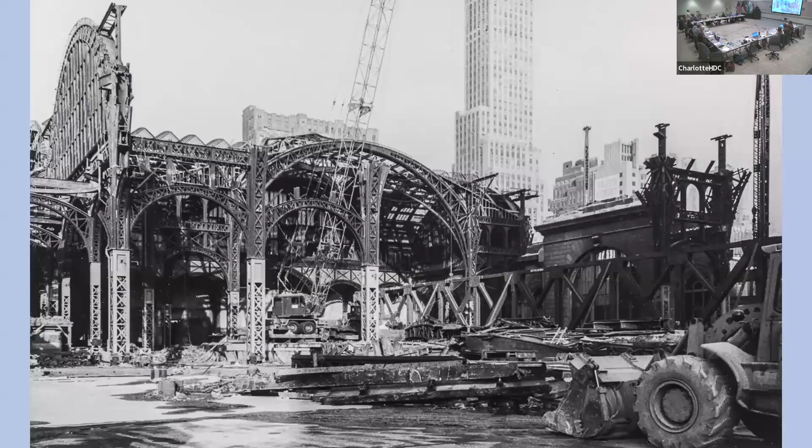Jane Jacobs writes her famous tome in 1961, The Death and Life of Great American Cities, which was kind of an academic response to urban renewal. Then there was a catalytic event: 1963, Pennsylvania Station in New York City was demolished. Well, it took several years to take it down and replace it. It's where Madison Square Garden is now. That was such a stunning and visual event that it really galvanized the modern preservation movement and led to a political response, which was the National Historic Preservation Act of 1966.

LBJ signed that document into law, and that is the linchpin of everything that we do in government, at all levels of government, pertaining to preservation. It arguably most importantly established a checks and balance system within the federal government to review taxpayer-funded projects that may impact historic resources. We call this Section 106. If you pull up the National Historic Preservation Act, it's Section 106 of that law. To this day, it may still be the most impactful legacy of this bill.

There's an entire team in my office that does nothing but Section 106. Anything you can imagine, from cell phone towers to road widenings to railroad right-of-way issues to community development block grants, funding from HUD, everything goes through Section 106. So it's a huge part of the law.

This law also established the National Register of Historic Places, which is the government's list of historic stuff, so to speak. That's a huge part of what we do at the state level. And it authorized a federal grant program for restoration of National Register listed properties. That's the seed of the historic tax incentives program, and a lot of what I do pertains to that incentive. I'm not going to get too deep into that today.

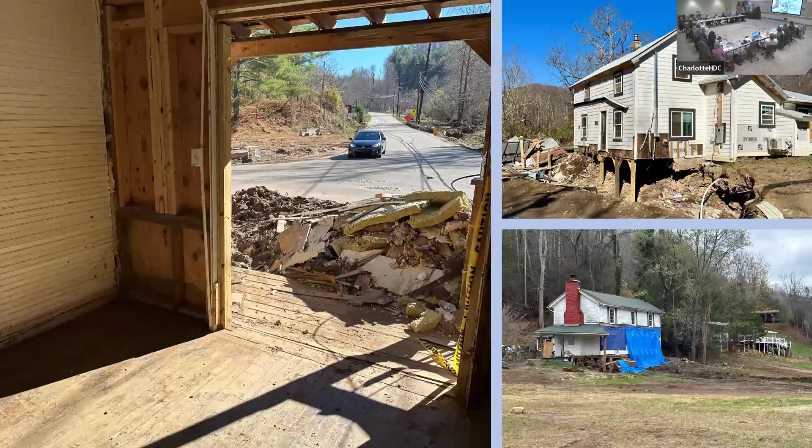Last year, I should say, and into this year has been especially different and challenging in certain ways with Hurricane Helene hitting the western counties. We have one specialist based in Asheville who was displaced for several weeks. She was overwhelmed, and so if you called me in October, November, and I did not return your call, I'm very sorry. We divided that service district up, and I did a lot of work specifically in Yancey and Mitchell counties.

Immediately following the storm and ongoing, helping folks dry out historic buildings. As you may know, historic materials behave a little bit differently when exposed to water compared to some newer materials, and providing assistance on structural assessment. A lot of properties had two major problems: a lot of inundation, and a lot of land movement, either landslide activity or foundations being undermined by essentially new rivers that came up. So a lot of really challenging issues out there that continue into this year.

So that's a major thing that our branch has been grappling with.

But we are bureaucrats, and I like cartoons. And I heard a cartoon mentioned earlier from the 70s about the Charlotte Historic District Commission. I bet there've been a couple cartoons in the Observer about this body. I would think preservationists are often the butt of jokes.

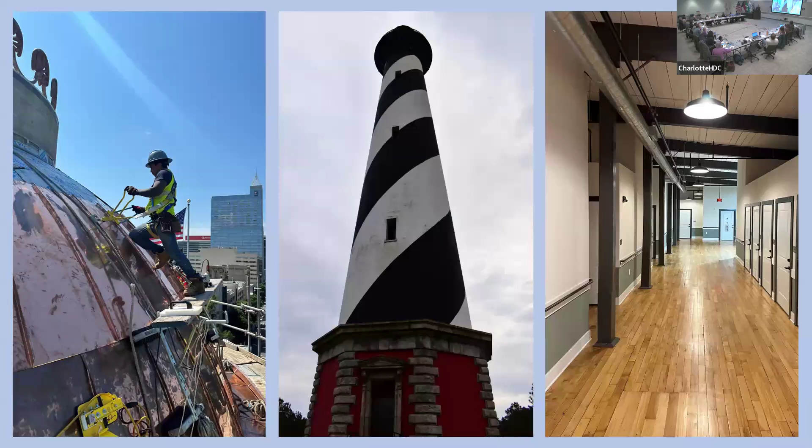But we are bureaucrats in a way, and I do have review responsibilities, just like you. We review federal undertakings. So in the center, the Cape Hatteras Lighthouse, that is a federally owned building. It's undergoing restoration currently for the first major time since it was moved in 1999, 2000. So we automatically review that project under Section 106.

The state of North Carolina has a corollary law, GS 121-12A, that makes us review in an advisory capacity state undertakings. This past two years there was a big restoration project at the state capitol, and we were very pleased that the General Assembly welcomed us in as consultants and made a space for us at the table when they didn't necessarily have to, which went really well. And on the right-hand side, tax credit projects, mill rehabs, we review those all day.

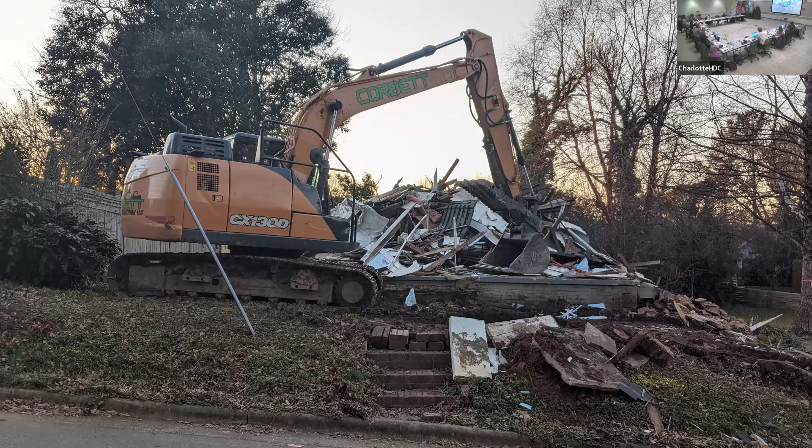Not in a way that's disingenuous, but in ways that help expand that perception of what we do. Preservation is all about change. If things didn't change, there would be no need to preserve anything. So what you all do as commissioners is help manage change on behalf of the city as enshrined in ordinance. That involves inevitably demolitions, some tragic, some not so tragic. It involves finding creative solutions, sometimes accepting solutions that aren't ideal but are still victories, maybe with a lowercase v instead of a capital V. Building relocation is sometimes a solution like that. It's not necessarily ideal, but better than demolition. What we really aim for, as people interested in old buildings and how they survive and remain durable over time, is for buildings to be in continual use, continually enjoyed by the public.

And that's really what the goal is here for everybody, whether you're working on a mill rehab through tax credit review, or just someone updating a kitchen, building an addition, or doing paint work to their shutters or front door. It's all about keeping these buildings in use and helping them communicate their story.

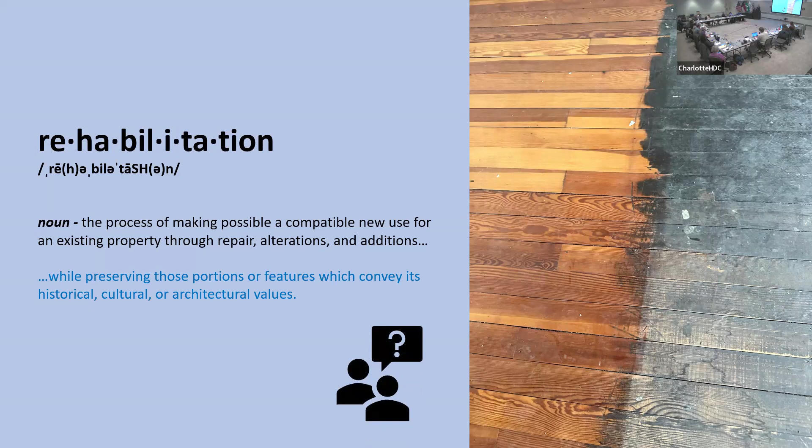So buildings are storytellers. In order to keep them alive, we have to keep them modern, up-to-date, safe, enjoyable, comfortable, but we want to preserve the elements of the buildings that best convey their history. You're like, okay, well my head is spinning. That sounds so esoteric, I don't even know where to begin. Well, luckily we have, as I like to call them, the 10 Commandments of Preservation, the Secretary of the Interior Standards. This is the roadmap for finding that balance between modification for continued use and excellent, wonderful storytelling on behalf of the building.

So what are the standards? 1976 was a big year, 77, big year, bicentennial. Charlotte Historic District Commission was founded. At the federal level, they put these 10 standards for the first time into the Code of Federal Regulations.

1966, like I said, had been the National Historic Preservation Act. National Register was established that year. It took about 10 years for the feds, the National Park Service, to understand that their small grant idea from the 60s needed a roadmap for how to review those grant projects. They actually began as 8 standards. They became 10 in 1976 and were published in 1977.

I am constantly amazed by the longevity of the 10 standards and how actually brilliant they are in a way. They haven't been substantially edited since. The wording's been tweaked on a couple of them, but it's not like one has been replaced entirely or totally rewritten. The 10 standards are basically about to be 50 years old.

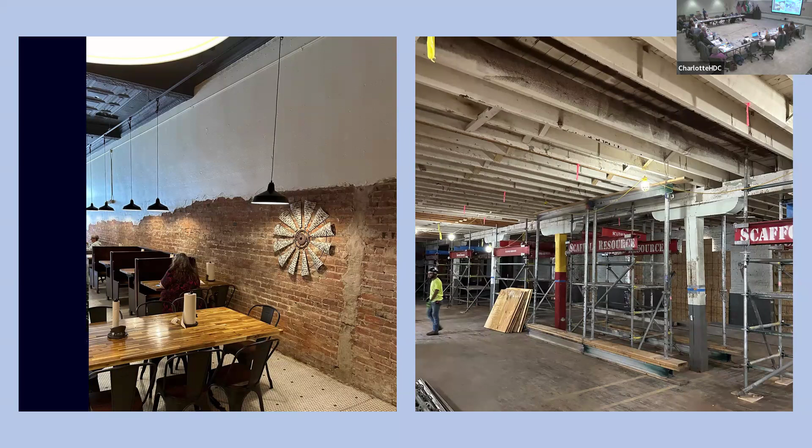This one, again, you're not seeing a lot of adaptive reuse in what you do. You're seeing mostly residences that are continuing to operate as residences, but very key to the standards is understanding that it's good to tailor your new use to fit the building, not tailor the building to fit a new use. And we see this a lot in mill rehabs that increasingly are going for brewery use, or in this case, distilling. This is a brand new distillery in Mount Holly, North Carolina, not far from here. That's not a bad use for an industrial building.

You need big open space, but imagine putting that still in a house. Then you're looking at taking out a hall and a formal room and making large structural changes to the building. So you probably get where I'm going with that.

And the last two points: accommodating change is part of the rehabilitation process. It's crucial. It's part of the process, not at odds with it. However, change that is modest in scale and generally reversible, those are desirable traits. We're going to talk a little bit more about that.

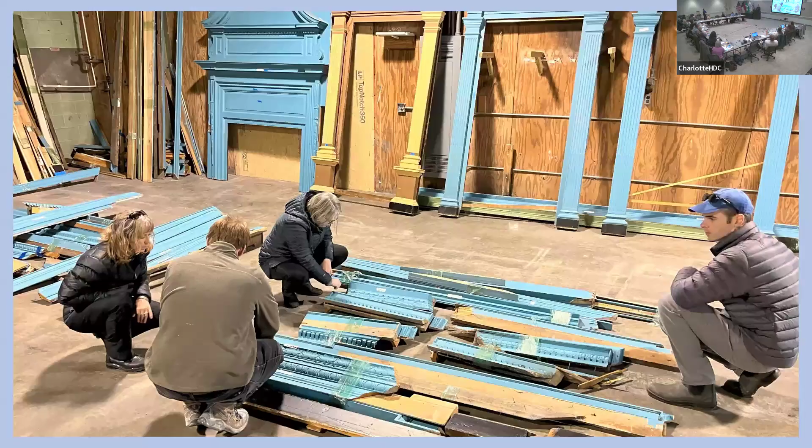They probably found that this room has been getting pretty dusty and people aren't interested in that type of presentation anymore. So after several years of back and forth, that woodwork has been repatriated to North Carolina, to Edenton. We got to go up just two weeks ago and check this stuff out. It's been moved back, it's in storage, and they're going to start installation in March. Should take probably six to nine months. But I thought you'd enjoy hearing about this story.

I wouldn't say that in 1918 they were thinking about the reversibility of their action, the Brooklynites who came down here to get the woodwork. I should mention that in the 60s and 70s, Edenton replicated this woodwork, so when you go in there are very high level replicas of all these pieces, which they will now take out and try to salvage in other historic properties in the area. But it's one of those things where, wow, 100 years go by and this stuff can be reused.

And in fact, it was in pretty darn good shape, not a lot of damage from two removals - removal from the Cupola House initially, and then a second removal from the installation in Brooklyn. So reversibility is something y'all are probably going to be thinking about with regard to additions, probably most specifically additions, since you don't look at interiors as much. We look at reversibility a lot for interior changes to floor plan, stuff like that. So I wanted to make you aware of that.

I do have a question.

Yes, shoot. So when you were talking about looking at use, I thought I'd heard on this commission before that we don't get into use. Is that something more with when it's commercialized versus residential?

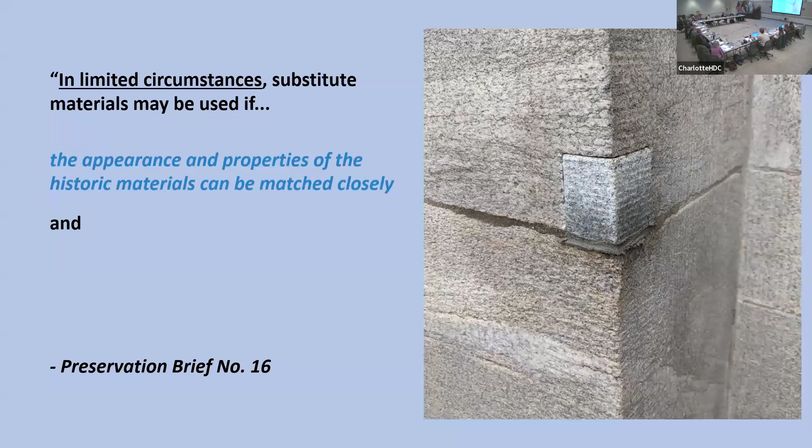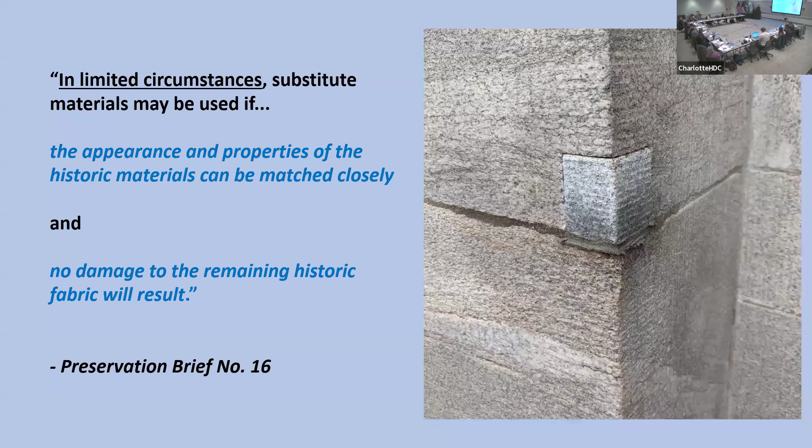So if you pull up Preservation Brief number 16, it says in limited circumstances substitute materials may be used if - and it gives two limited circumstances. The appearance and properties of the materials can be matched closely. So we're thinking about visibility, the visual presentation, and we're thinking about performance. How does it behave, how does it interact with water? Mainly, that's our main concern in our climate. So you want to get the whole authenticity question out of your mind, think about what the material looks like and how it behaves. And really, is its behavior going to create problems for neighbors, for the material right next to it, which may still be salvageable, may be historic, may communicate the history of the building. So we want to make choices that will not damage the historic fabric of the building. These are the two limited circumstances where you're really thinking about the possibility for a substitute.

So we'll expound upon these limited circumstances. Unavailability of historic materials - classic example is Connecticut brownstone, Portland brownstone. Up in New York City and Brooklyn, 1870s, they called it the Brown Decade. They were quarrying all this brownstone from central Connecticut to build that neighborhood. Well about 20, 30 years later they found out that the clay content in the stone made it a really crummy stone for building use. It expanded and contracted with moisture differences, freeze thaw. These buildings started to disintegrate. Uh-oh, it had durability issues, and then the quarry ran out of stone. So you can't get replacement Portland brownstone anymore. They closed the quarry.

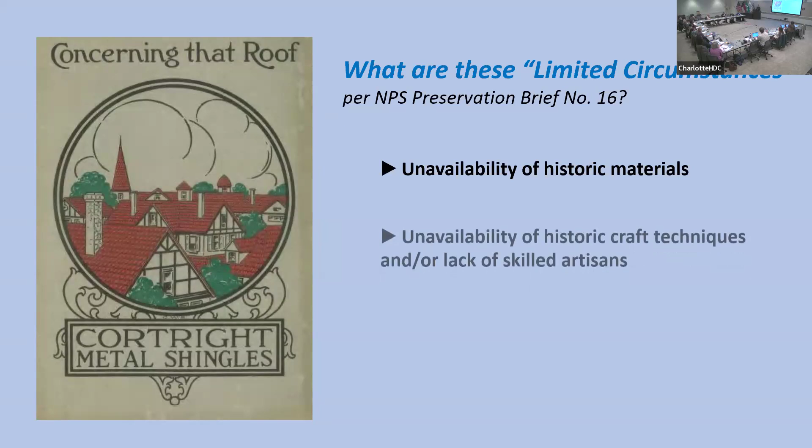Certain craft techniques are now hard to replicate or hard to find artisans to execute. The main thing that comes to mind in North Carolina for me with this circumstance is true standing seam metal roofs. It's hard to find artisans who can execute a standing seam roof in the traditional style. I'm not saying they don't exist, but they're not in every city. And your mind is already racing, I'm sure, about window restoration, for example.

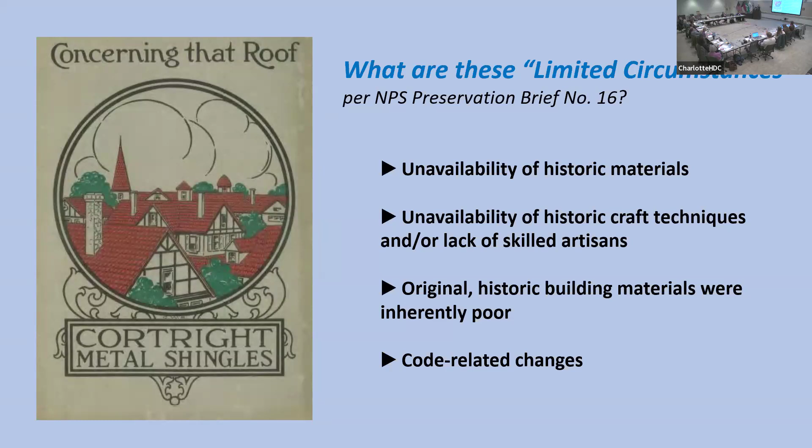Another limited circumstance, like the brownstone example, is if the original material was inherently flawed. Or code-related changes - this doesn't apply as much to this part of the country. Out in California, on the West Coast, there's a lot of seismic code issues that require heavy building materials, particularly those at height, to be replaced. So these are some of the extenuating circumstances outlined by Park Service, where we should open our minds up a little bit broader to the possibility of a substitute, granted again if that appearance and performance, and no damage to the surrounding fabric, if those criteria are met.

So something really exciting happened last year - Preservation Brief 16 was updated. And in fact one of the lead authors, Amy Elizabeth Ubel, is North Carolina's assigned reviewer at Park Service. She's a good friend of mine, and she was on the team that did this. My number one homework assignment for you, ahead of looking at that standards book, ahead of interpreting the standards bulletin, would be to read the reissued Preservation Brief 16. I challenge all of you to do that sometime before your next meeting.

You'll thank me later, because of the way that it's set up. The first part talks about the limited circumstances and gives you a framework of thinking about it. The second part that they added runs through all these different kinds of substitute material.

Anything from fiber cement to urethane 3D printed building features to cellular PVC, and all the typical players on the market today. It goes through each different class of substitute material, talks about performance characteristics, and areas where that material may be appropriate for use. I can't stress enough the value of the reissued Preservation Brief 16.

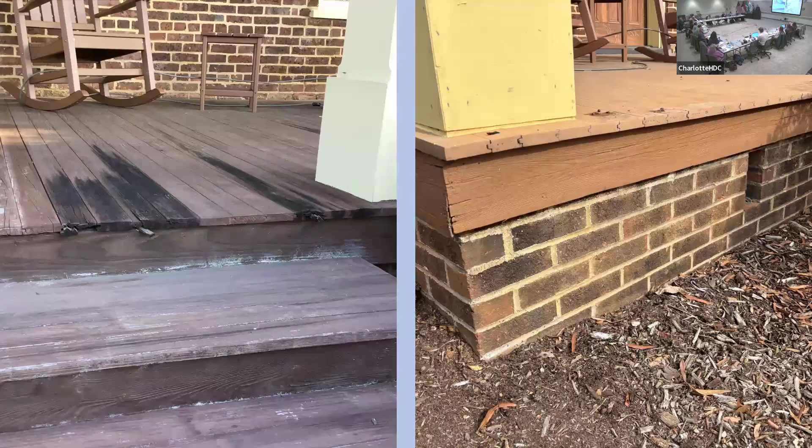I can't remember the next slide, but I think it's — yes, porch floors, a constant topic of debate.

This is an area where I've really seen a lot of change just since I started at the SHPO like 7-8 years ago.

PVC tongue and groove porch flooring is becoming more and more available, and we're getting feedback, having seen it installed in locations for 5 or 6 years. Porch flooring is subject to pretty challenging environmental conditions: UV exposure, cyclical wetting, exposure of end grain to water, expansion, contraction.

So in preparation for this talk, I went and revisited a couple of installations of PVC tongue and groove porch floor to see how they had done 5 or 6 years later. This is at the Page Walker Hotel in Cary, an 1880s hotel building.

The town of Cary owns it, and they called at wit's end because they had replaced the floor several times. The town was like, we can't continue to revisit this every 10 years, having to repaint if not selectively replace it. They were finally at the point of needing to replace it all again, asking: should we use wood, or should we consider a substitute?

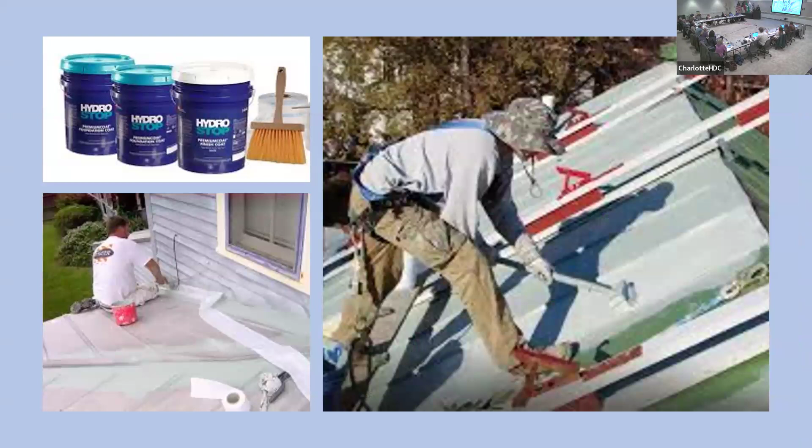My recommendation always when you have a flat panel standing seam roof is to do what you can to try to prolong its lifespan. There are hydrophobic coatings, two-part coatings that work with a mesh layer that perform really well on these roofs. So flat panel standing seam is always a good candidate for repair.

Metal shingle is trickier, and in y'all's districts you don't have a lot of metal shingle. Does Dilworth have some metal? Metal shingle was real hot in the 1900s and the 19-teens, Queen Anne into early 20th century, so this Foursquare style. But bungalows, I don't know - I can't think of any.

Does the house next to it have copper, or is that slate? Am I thinking of the slate? We have a lot of slate. I can't think of any slate. Pressed metal - Candace, was there pressed metal?

No. Anything in Fourth Ward? Yeah, the good news, Sarah, can you think of one? I want to ask a question about roofs, but I can't think of a situation.

The good news about metal shingle is that they're back in production, and some are better than others. How successful this replacement is, I think it's good enough. What I think is harder is the panelized metal roofing on the porch.

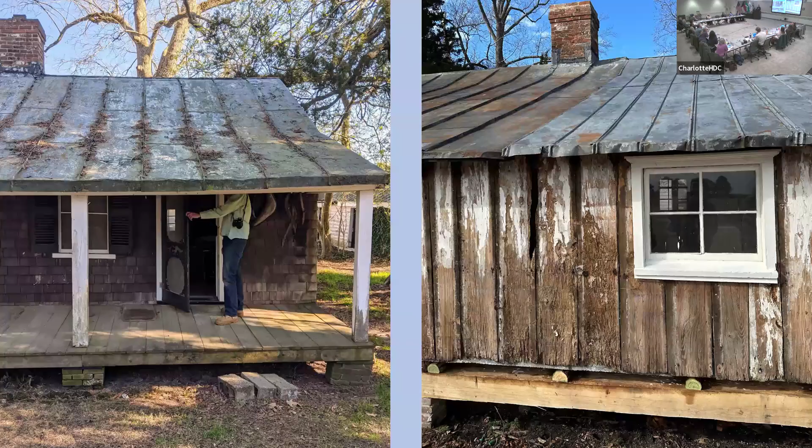Like the Victorians that we have, the roofs are pretty prominent and they have the decorative slate and all of that as well. So the discussion amongst the commission would be, you have these areas of decorative slate versus regular slate. How can that be replicated with an architectural shingle or even a faux slate?

More often than not, slate roofs are pretty prominent because it's a high level material. They didn't put it up there for kicks, for fun. They wanted people to see it. So most of the cases you get, I would reckon, are going to be fairly visible.

The other challenge with roof replacements is the need for warranties to exist and to be covered, to cover the installer. So your ability to get creative on a roof replacement, say to salvage slate on one roof plane while tying in new slates or a substitute on a separate section of the roof, gets pretty hard to do. A lot of manufacturers won't honor their warranty on that, and installers won't honor a warranty on it. So sometimes your hands can get tied a little bit more easily in a roof replacement discussion.

So I wanted to show you all just briefly an interesting building that came up from Edenton. This is also in Edenton from a couple weeks ago. This is on the site of Hayes Plantation outside of Edenton. This is a slave dwelling from, they guess, about 1840s is the supposed date of construction on this building.

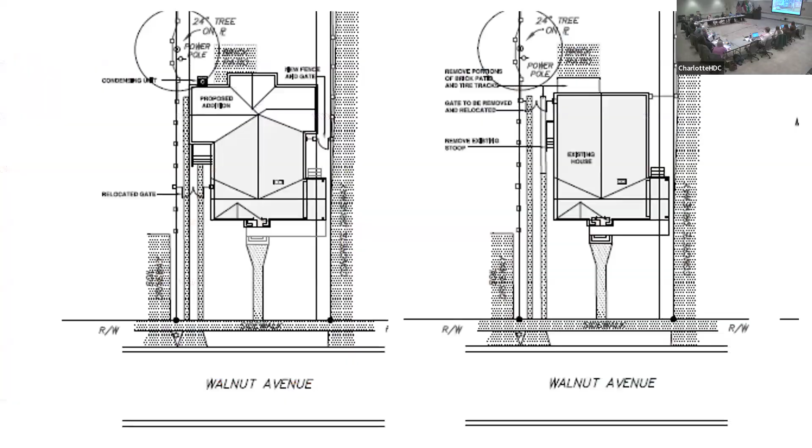So we continued to push on the architect. And what we got to was an addition that I felt like really epitomized the homeowner tax credit at its finest, where there had been a discussion. I'm not just saying that because we got our way.

Because it was a back and forth. And I think there was, now I never communicated directly with the building owners on this project. It was always through the architect, but I got the sense that there was curiosity involved and a willingness to see things in a different way. And ultimately these folks went from a two-story addition to a single-story addition. So they gave up a lot in the process.

And I don't know what screws you guys were turning on your side, but I think it got to this before the commission even saw it. It did. It got to this. I cannot remember if it came to workshop. It may have come to workshop with the ones that you saw.

So the high level non-binding feedback of the commission, that's where, and you can still argue the volume of the entire addition exceeds the volume of the original house.

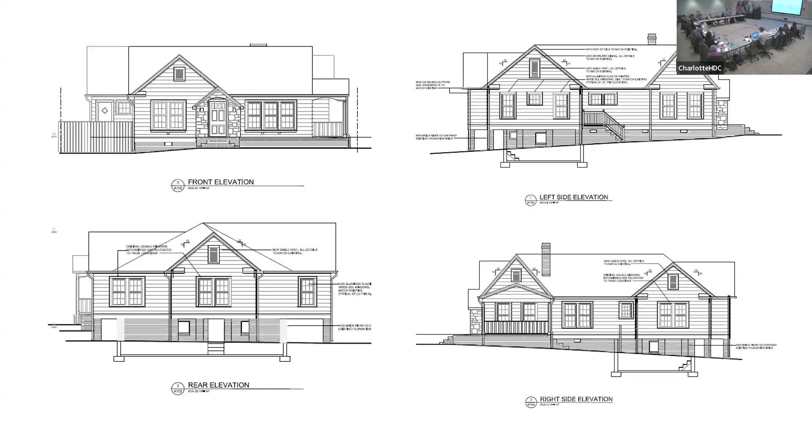But that's not readily apparent from the street. We feel like it's rehabilitation, right? It continues to make this house perform in its current context, in the real estate context. And, you know, I forgot about this. We just like our space in the US. We like space, that's what's desirable. As preservationists, we have to recognize that at some point.

Of course, when it comes to infill, it's becoming increasingly hard, and these are all from Raleigh, to sometimes locate historic houses in their historic environment. And so I think I've showed you these two before.

And what's so excellent about y'all's standards is you have this wonderful section that illustrates through great graphics what we're aiming for in terms of setback and scale. That's section 6 on new construction.

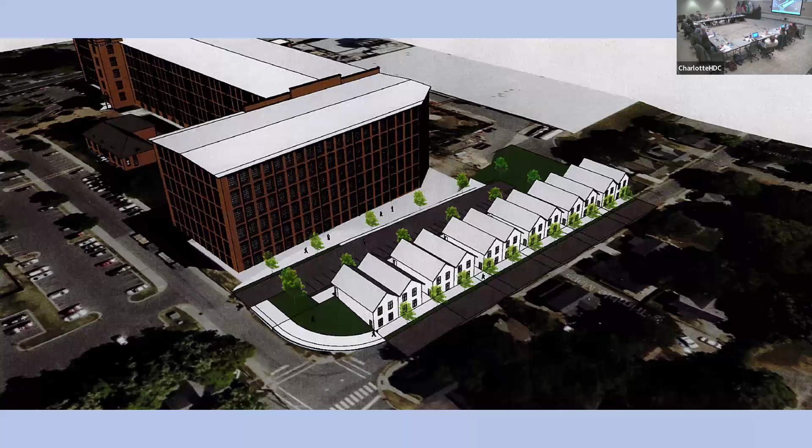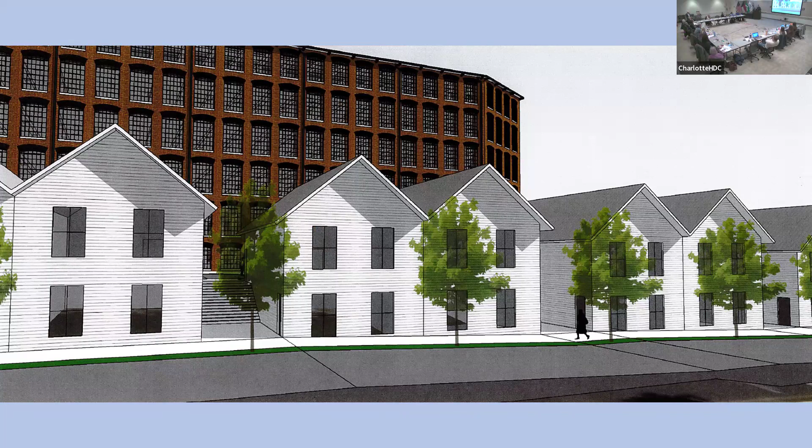This conceptual rendering—even today when I look at it, they remind me of the little house pieces in Monopoly. It's like someone went along and stacked up houses next to Boardwalk. Obviously the design wasn't all that well formulated. I want to point out that the way these properties were going to be accessed was actually on the mill side—there were going to be parking spaces, and the entry door would be on the mill side, not on Vance Street. They would be activated in the direction of the mill development. How do you all think we responded to that?

What are your thoughts on that in regards to some of the concepts we've discussed? Form, setback, orientation—if we go back to Standard Number 9, we're talking about the integrity of the environment. I know.

It's a lot more jarring to have the orientation face a parking lot—for me that's the biggest issue with this, because you're taking away the intention of this being a neighborhood street when you flip the entrance to the back. That is, in my opinion, the biggest disruption. We shared that view, and the National Park Service shared that view. We felt the proposal fell short of protecting the integrity of the mill neighborhood. It's taking what had been mill houses and flipping the entrance the other way. What happens to Vance Street when it becomes an alley behind these new houses? So orientation, in that case, rose to the top of the list.

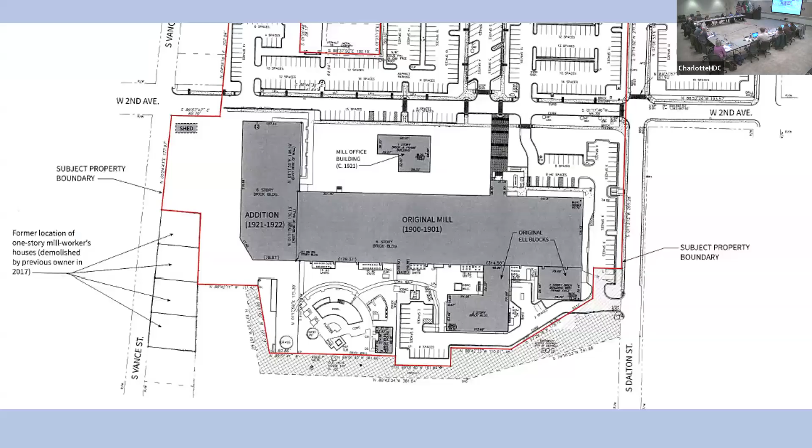I'd suggest too that the way you're framing it is like how some architects have framed things to us as, here are the two options. And if they're both bad, I think it's incumbent upon us to say that, and to say we don't have to accept an architect's rational and expected advocacy for their client as the only options we have. Sometimes our answer must be no.

Agreed. You cannot meet your client's needs or desires on this site, flat. And I think that's a very difficult thing for some people to say. So that's, I guess, why I'm here.

But I just think that's a really important thing for us to remind ourselves: that just because we're presented with a set of options doesn't mean those are the only ones we have to consider, or that we should think one of those has to be acceptable.

I completely agree with you, Cameron. And I'll add to that, that sometimes we've been met with, well, give me what I want or the house gets it—you know, we're going to demolish the house because legally we can't stop that from happening. And I'd say our response to that is: you still won't be able to build this.

That's awesome. What did the state say? No.

What happened was the Part 2 application was approved on the condition that this design not be constructed and that it be rethought. And we haven't yet gotten an update on that design. But yeah.

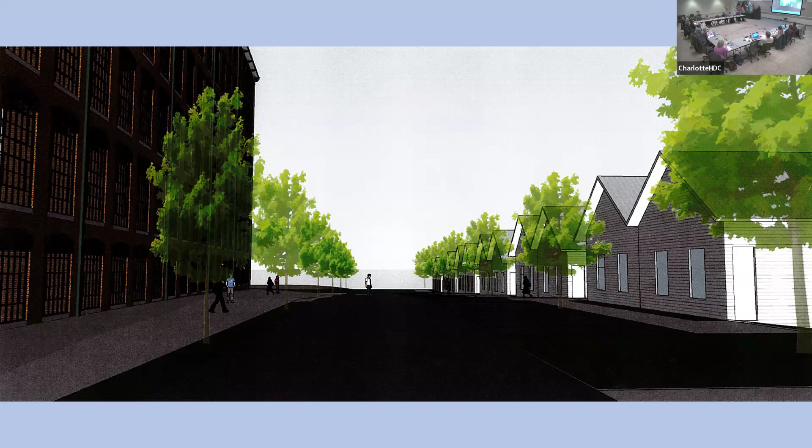I'll show you one last example from Charlotte: Johnston Mill, North Davidson Street, East 36th Street. That's the new building. I don't know, are y'all familiar with this development?

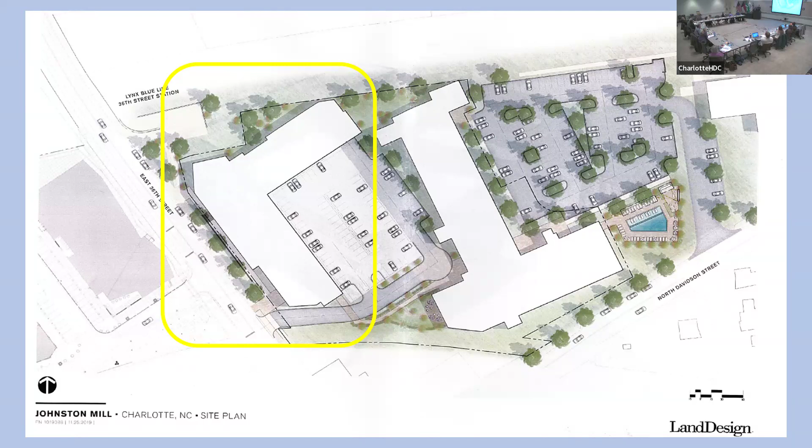We reviewed the new construction formally. It wasn't a focal point of our review—obviously the mill itself was—but because the new construction occurred on the mill premises within the National Register district boundary, and because they demolished a very deteriorated building on that footprint that had been functionally related to the mill, we got the chance to comment and review on the new construction.

I'll show you the evolution. This was what came to us first, in a preliminary review before the tax credit application even arrived. You can see a lot of kind of adventurous things in this proposal—for instance, this giant light well created in the mill itself. Obviously some architect didn't understand tax credits at that time. But we were looking primarily at the volume of the new building.

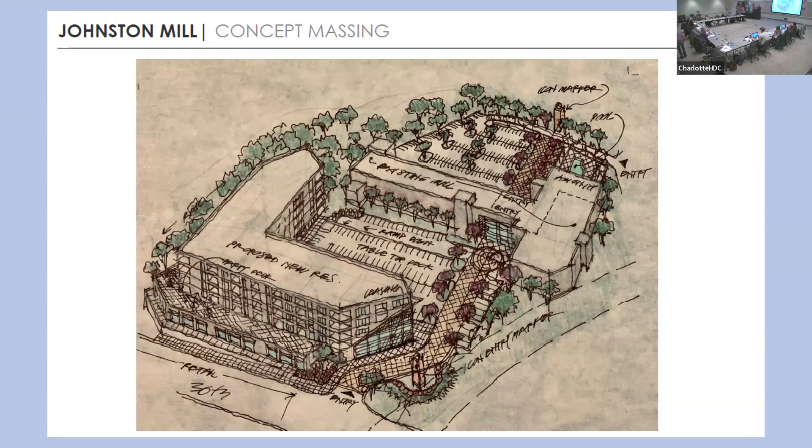We saw a building that was in almost all aspects larger than the mill, but particularly taller, which was our main feedback. We understood our relatively limited role to police, so to speak, how they were going to detail the new building, but we felt like it was much, much too high relative to the height of the mill.

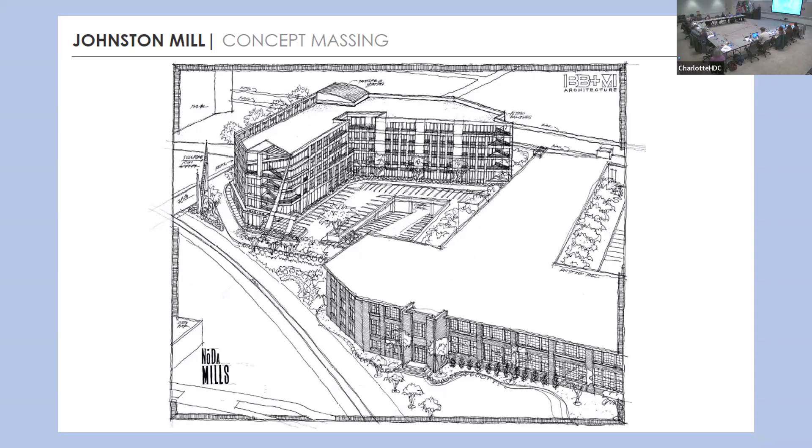This is another view of that initial proposal. You can see sort of the sculptural details that had been envisioned, the cantilever balconies and stuff—that was all again quite daring. We understood we may not be able to influence much of that element of the design, so we really focused our feedback on height.

What we got was, in the area closest to the mill, a concession of a story. So you can see the drop down where they're at 4 stories closer to the street front of the mill, and then along the light rail corridor they've kept it at 5.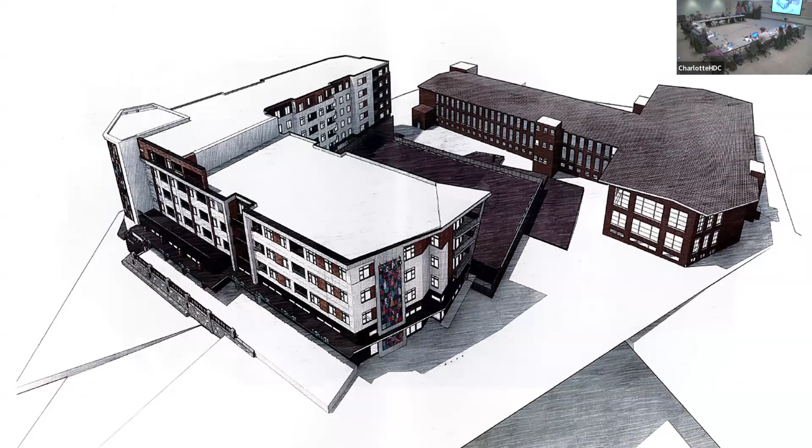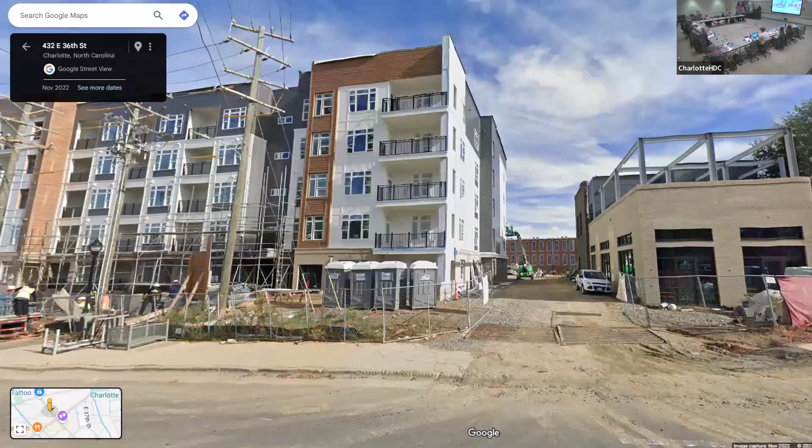This is what came through on the Part 2 application. And then this is what got built, which is always also fascinating.

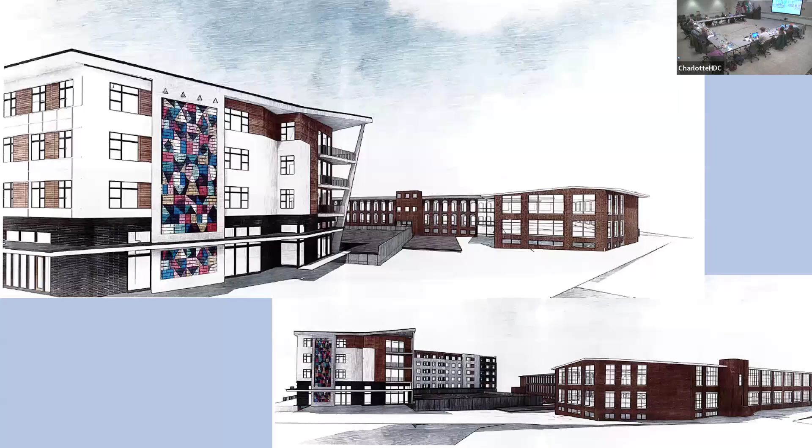I was thankful that we didn't have to field amendments to the design on the new construction the way we fielded amendments on the historic building. But a lot of the more geometric elements of the design were value engineered out. We got a building that was still extremely tall in my opinion, with a high parapet.

The one saving grace, I would say, with this situation is the orientation on the property, because the main focal point on the mill itself is from North Davidson Street, right where the old railroad line crosses North Davidson. The new building is beyond, so it doesn't really interfere with the front-on perspective of the mill.

I wouldn't call it a victory per se, but it was a situation where we didn't get a full-on 5-story or 6-story building right next to the mill. And in terms of its orientation on the lot, that's something we looked at a lot too.

Thankfully, the dynamics at play—as I was reading it through the developers, they really wanted frontage on the light rail, because that's a free billboard; people were going by and see the big old building you just built. So they were very keen on volume and height on that side, which is the side farthest from the mill. That was potentially just coincidence.

But that's the last one I have for you. Again, we don't look at a lot of infill—it's a very difficult task. So I hope I've given you at least some curious points of view on it.